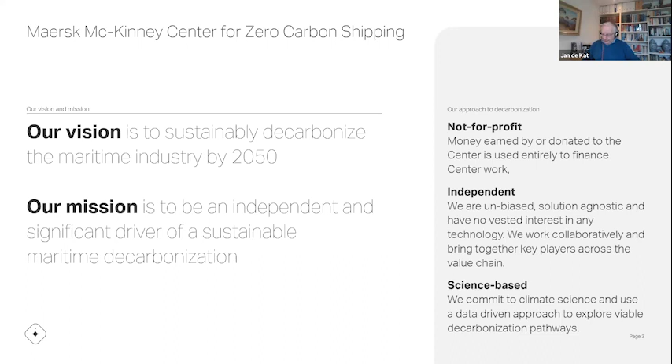The first one is reducing energy demand on the fleets. That's really anything to do with how to improve energy efficiency, how to help regulatory processes, and making legislation and regulations that encourage energy efficiency uptake. How can you do this? What kind of frameworks can be developed for this? How can we share information in this area?

The second is anything to do with new fuel, so the energy system. How do we scale up the green fuels? This is really a major challenge, we'll come back to that one. Also looking at what onboard vessel solutions you would need, but also infrastructure development, production of the fuels, and so on. That's all being considered here.

Then there's the ecosystem transition. This is where we say, okay, how can we identify first movers in the industry, and maybe also in the realm of green corridors. There are some green corridor developments in Australia, from Western Australia to Japan, for example, and another one we've been looking at, between New South Wales, East Coast, and New Zealand. But there's 30 or 40 green corridor initiatives. I won't go into further detail, but it's happening—initiatives to help accelerate this process of fuel developments, the ships, etc.

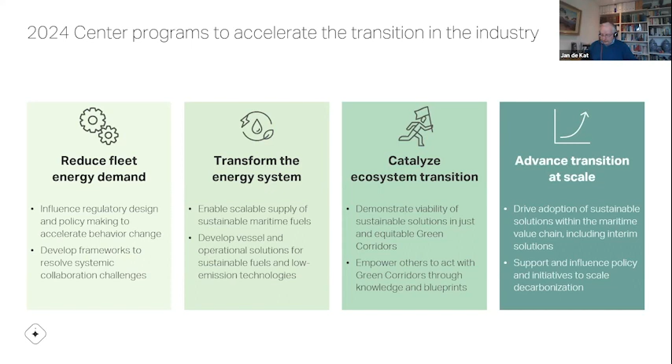And then the other one is looking into policy developments. This is to say policies that could be in place, or can we help develop policies? It could be IMO, it could be regional, like in the European Union, to help get this greenhouse gas emission reductions process working.

Just a few more words. The center was started 4 years ago. Now there's about 130, closer to 140 employees, partially full-time employees and partially seconded, and the center has a number of partner organizations.

Altogether with the secondees, we have well over 100 specialists, and they cover the whole area basically. This is super interesting because it's from the fuel supply side, people with a bio-fuel background, or economists, naval architects like us, all the way to the cargo owner. So it's really the complete value chain represented here, and everyone has basically the same focus or aim. These partner organizations, 24 of them, are the key partner organizations.

So if you look at this from the other perspective, where are these organizations placed?

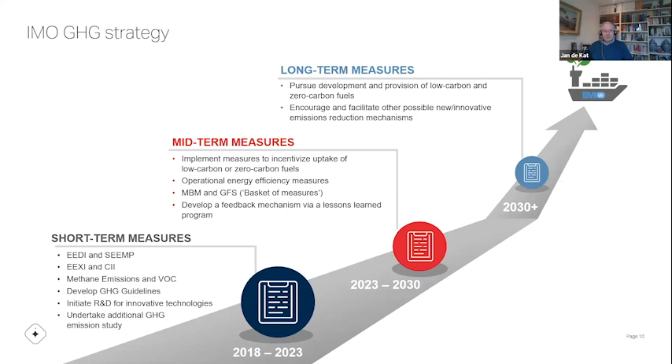But then we had the 2023 strategy, which was really a major breakthrough for IMO, because at that meeting - MEPC last summer - it was agreed to go much further than the 50% reduction target from 2018. That's the first time I saw a standing ovation from the whole plenary session at MEPC.

So what was agreed: by 2050 or thereabouts, to achieve zero greenhouse gas emissions, together with a number of intermediate steps and levels of ambition, including the carbon intensity reduction - that was actually one of the short-term measures from 2018, which has still been upheld. But also encouraging uptake of 5%, maybe up to 10%, of new fuels - zero GHG type fuels or technologies by 2030 - and reducing absolute emissions by 20 to 30% in 2030.

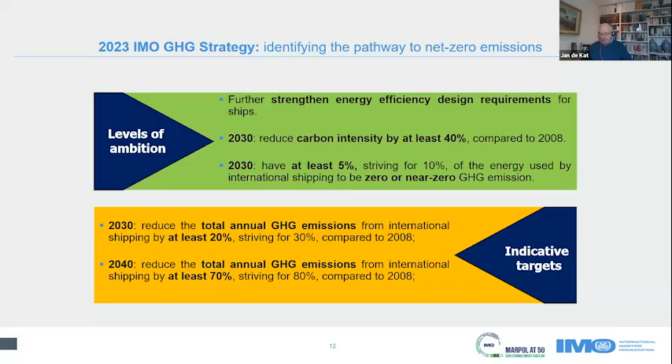It will go up because, as part of all the efforts we have now, trade will continue to increase, which means more and more ships will, of course, enter into the world fleet. And then how do you do this while you're actually reducing overall emissions? So that's one of the big challenges. Okay, so that's just the background.

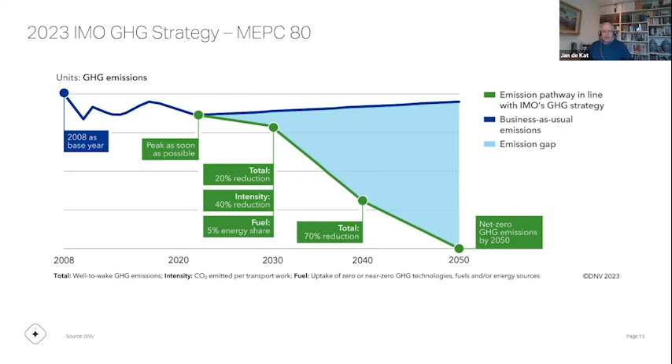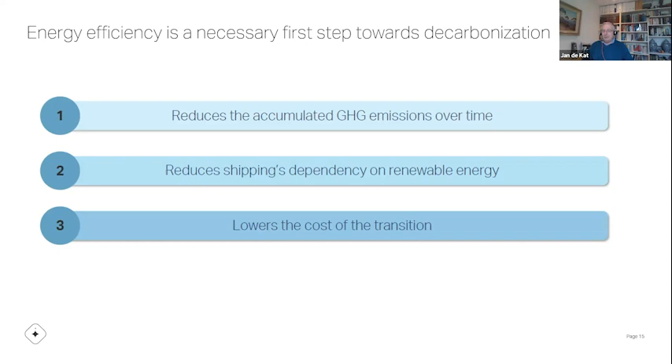So starting with energy efficiency, you could say energy efficiency is something we can do now. It reduces overall emissions for all ships, because you save fuel, but also by doing this, it reduces the dependency or the demand for the new fuels. So anything you can save there is, let's say, invested. And of course, it affects also the bottom line. The more efficient the ships are that we are running, the less the operating expenses will be. So the cost of transition will be lower.

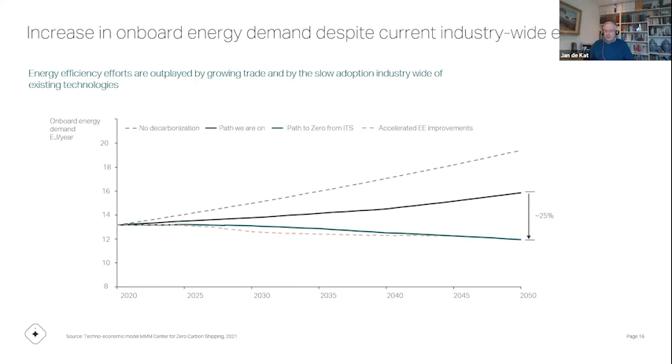A quarter of ships would then also have to invest in the more expensive technologies such as air lubrication and wind assisted propulsion, as we were just talking about. And there, you see it would mean a 400 times increase in what we have now in terms of adoption of these technologies. And this would all have to be done by 2030. So definitely a big challenge.

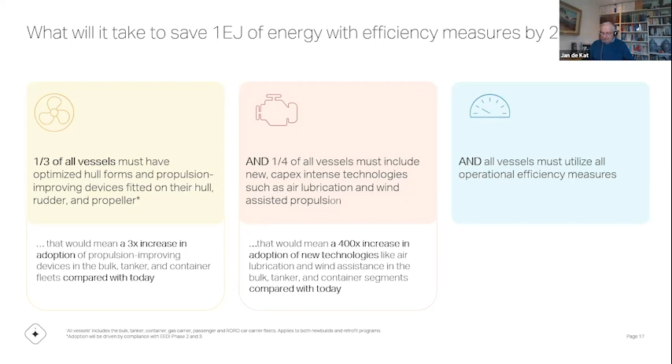And we did some analysis on the different efficiency measures that are at our disposal, and it could be technical solutions, hull and propeller design, engine systems, energy efficiency on board, new technologies, and operational measures, of course, really important too: what you do with your hull cleaning, voyage planning, weather routing, all these kinds of things, the utilization of the vessels in the fleets, and so on.

The picture on the right paints, I think, a not so great picture. Which ship segments have invested or are doing this as a matter of standard procedure, design and operation wise? The cruise ships, the passenger vessels, they do this now. It's almost all vessels. Container ships are on their way, but not all of them do this. But it's very limited, as far as we could see, for the bulk and tanker sectors. And if you look at all these four sectors, especially the bulk carriers, the tankers, and the container ships.

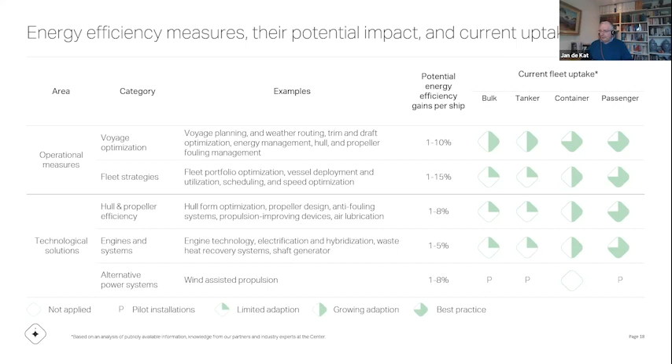They already take care of the 80% or so of the total emissions for the world fleet. So they are really important to have included. So the question is, then, how can one encourage the uptake of further energy efficiency for those kind of fleets? One thing is maybe you could say regulatory.

We talked about EEXI, so that's the EEDI for existing ships. As I said, I'm not sure about its impact in terms of energy efficiency. But the other one here on the right, the CII, which is this carbon intensity indicator, could have a higher impact on the uptake. And this has just started last year. The reporting is being done now for the first, let's say, year of operation, and let's see what

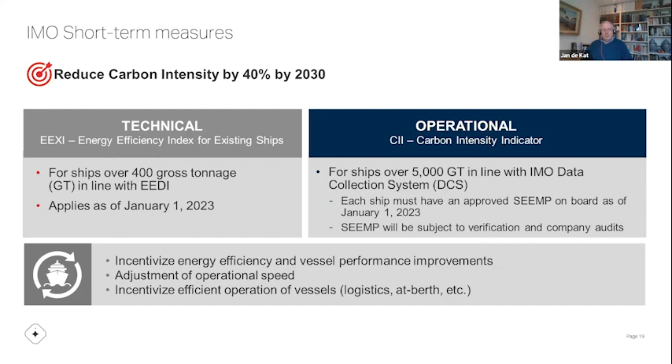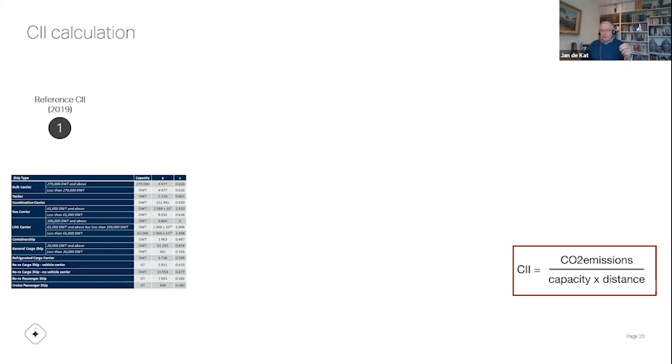comes out of it. If you look at how CII is calculated, there was a lot of work done on investigating all of the different ship segments, from the cargo vessels and also passenger ship and ferry areas. Lines were drawn to say, okay, what is the carbon intensity for those vessels as a function of dead weight, and this carbon intensity is basically CO2 emissions per transport work. That's what's called carbon intensity.

And the idea is that the required or allowed carbon intensity would be stricter and stricter as the years go on. So you can see here the table in the middle. We're starting in 2020, and then every year it is reduced by 1%. As of now, every year will be a 2% reduction until 2026. And after 2026, there's no agreed reduction yet.

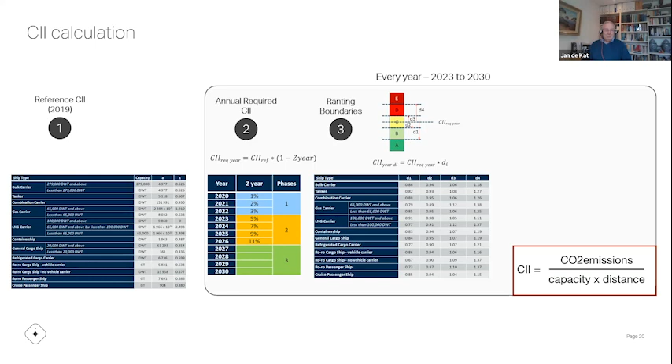So the idea is that every ship would have to compute, after 1 year of operation, what the carbon intensity has been, and then you get a rating. Depending on how well you do, you get an A, B, C, D, or E rating. And that's really indicating how efficiently the vessel has been designed and operated. So if you're in the D category, it means you're above the allowed, or let's say intended, target for that particular year.

And then you have to come up with a plan to improve that efficiency and show that you are doing things to actually get back to a better rating, the C or the B or whatever it might be. Trouble is, it's not so easy. It depends on the ship type and its operation, its trade, very much. And one of the items is also that the CII, as you can see here in the right bottom, is expressed as the amount of CO2 emissions divided by capacity times distance. So this is sort of a proxy for transport work, but capacity meaning the dead weight.

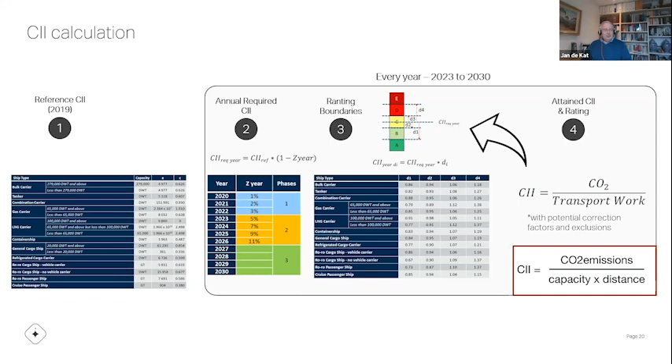So whether the ship is fully loaded or partially loaded or in ballast condition, that doesn't matter. It would still get, let's say, the same rating. And this proxy is called the AER, the annual efficiency ratio. And so for some vessels, it could definitely be a challenge. So you can see here just the principle of it again. Over the years, for a given ship type and dead weight, you get this progressively more strict requirement for the CII.

You can be in the D rating for like 2 years or so, but then you have to come up with a plan anyway. If you have a ship in the E rating, immediately you have to come up with a corrective action plan, as it's called, which means you really have a limited time period to improve the performance of the vessel from E to C or better.

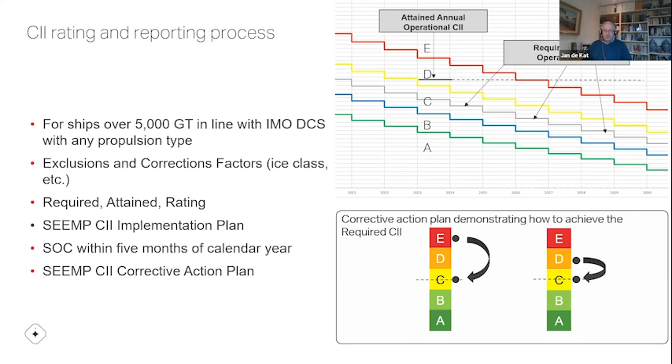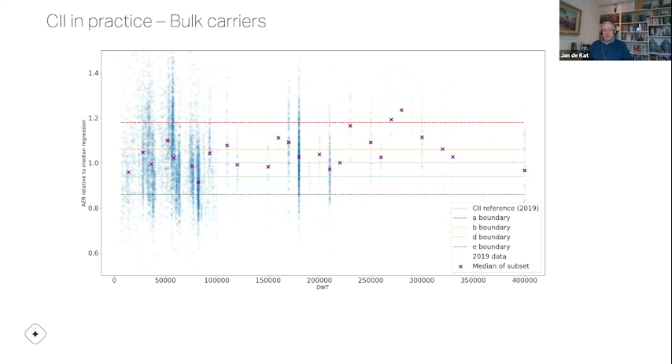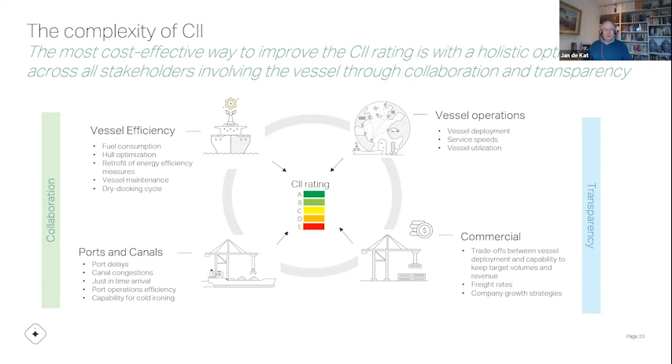So just to indicate, we have an interesting challenge here for ship owners and the charterers. And this is really the issue with CII because it's influenced by so many different things. It could be the vessel design process, how efficiently was it designed, how is it operated. It's the delays in ports that will affect this factor, how the ship is maintained, and then there's commercial decisions. All of these influence this. So you could say, therefore, from a contractual perspective, also quite a challenge. Okay, just to be noted, but we hope at least that this will definitely focus everyone on the need to be as efficient as possible.

I won't go into much detail here, but just to indicate there's quite a long range of things that one can do to improve the energy efficiency. And these are just indicative efficiency gains that could be expected, but anywhere from a few percent to 10%, or maybe some even higher than 10%, could be achieved. And by the way, we say here for wind assist up to 8%.

This is wind assisted systems that have been tested and publicized, but there's also now, instead of just wind assistance provision, systems that maybe provide a significant amount of propulsion power. It could be 30 or 40% or 50% or whatever. But that's coming up in the future. So these are numbers for the typical cases where we're seeing the wind assistance system. But similarly for other things like power generation, what can you do with frequency control drives or boiler optimization? So there's small things or big things one can do.

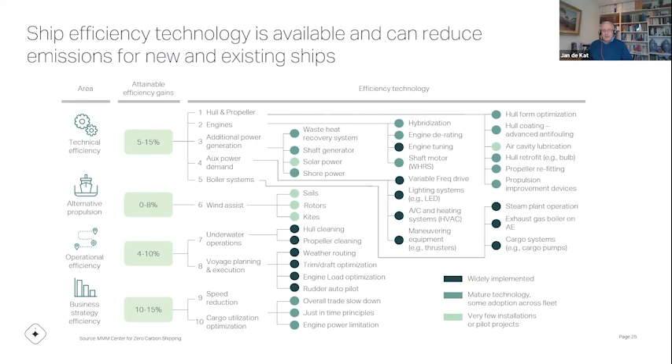There's a lot of things one can say. You can talk for hours about this, but I think one really important thing is to be aware of ships, especially these kind of ships. For example, container ships have an operating profile which is quite varied in terms of the drafts, the degrees of loading and speeds. Yet in the past, these ships were designed for one particular loading condition, which used to be fully loaded, high speed, like 24 knots, 25 knots.

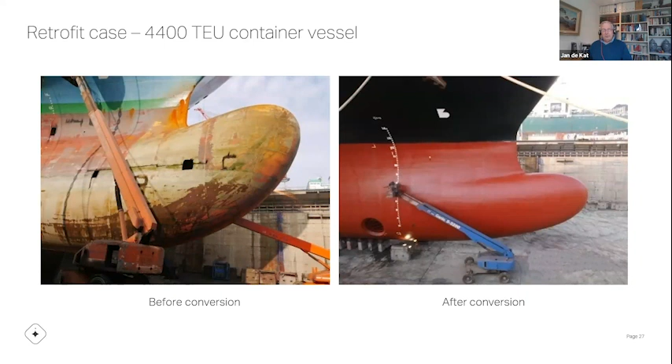And this is just a retrofit example on a container ship. It was designed originally with the bulb on the left, your typical good old-fashioned bulbous bow. But then we looked at what can be done; you can use CFD and model testing to optimize the bulb for its operating profile, and then you get a rather different looking bulb, and just the bulb modification gave, I think, an average fuel savings of about 10% or so. So we can do the same with propellers, energy saving devices, and of course anything inside the vessel too.

And when it comes to the energy demand, there's a lot of things one can do here too, in terms of things like waste heat recovery, also for smaller systems on board, combinations, battery systems. So we can see now coming up for ships, maybe not for propulsion for the big ships, we can forget that for the moment being, but maybe for power generation. So you can let your auxiliary gensets run on a constant level, and when you have a peak demand, you could have a battery system take up the peak, and so on. So there's a lot of things one can do here.

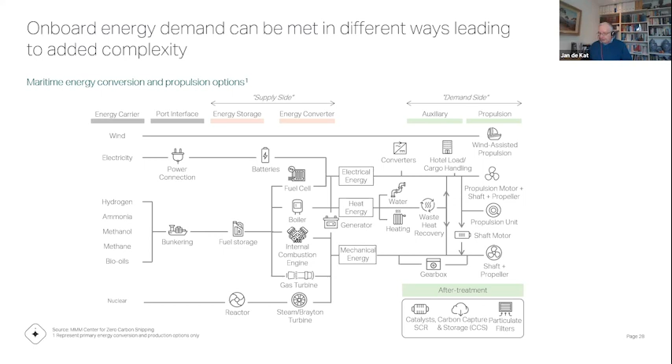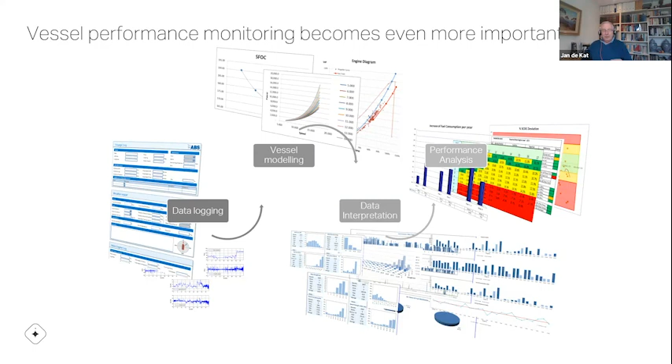Lastly, it's really important, even more important now, to have very good information on how ships are performing. That means you have to do performance monitoring, very accurate measurements of your fuel consumption. What are the conditions? Can you note when the hull gets fouled or the propeller gets fouled? Engine inefficiencies can all be detected, but you need a good system on board. This could be another item to talk about for hours, but it's really important, and as alluded to earlier, when we have greenhouse gas pricing, a CO2 levy or whatever coming up, it will be even more important to have very good information on the actual fuel consumption on the vessel.

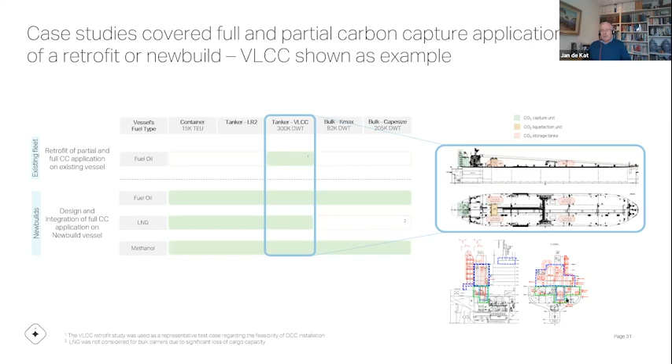You can see here some pictures of how the impact would be on the superstructure area, on the engine room, and so on. Now, for me at least, one of the big surprises was that the extra energy required to do the capturing is significant. Of course it depends on the CO2 capture plant, but what we have seen - this is an amine-based system from Mitsubishi - I think you get similar things for other systems. At least I've not seen one that's very efficient, but just to indicate, to get about 80% capture rate of your CO2, you need another 40% or so extra energy to just run the equipment.

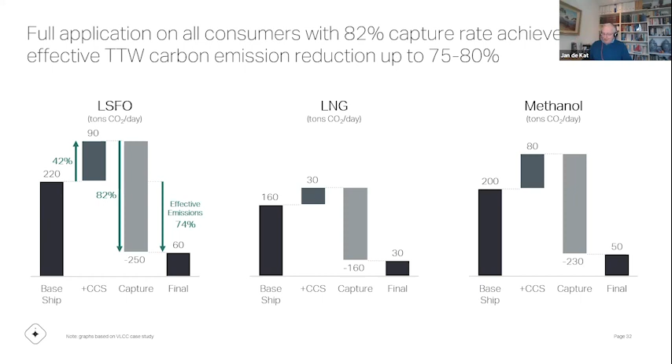And then we should also note that, because you have that extra energy requirement, you also need extra fuel, obviously. If that's conventional fuel oil, then you need to look at its part of the impact on total emissions. But even when it's a green methanol or some green fuel, it will be significant.

You see a significant additional cost because of the additional fuel, compared with the case where we have no carbon capture. So leave it at this, there'll be more work definitely. It is ongoing, with more proposals and information coming into IMO on this from different member states. The other thing is you must look at the total picture: what do you do with the carbon captured? Where do you bring it on shore? What is going to be done with it? How do you ensure that carbon will be used, either stored on the ground permanently, or can it be reused for producing, say, a methanol type of fuel? Anyway, still to be followed up.

Then finally, a few words about the new fuels. I think the important thing is just to look at the types of fuels. We often have the fossil fuels now, but biofuels have been coming up, meaning any kind of biomass or waste product, agricultural waste or whatever, that can be used to produce some kind of biofuel.

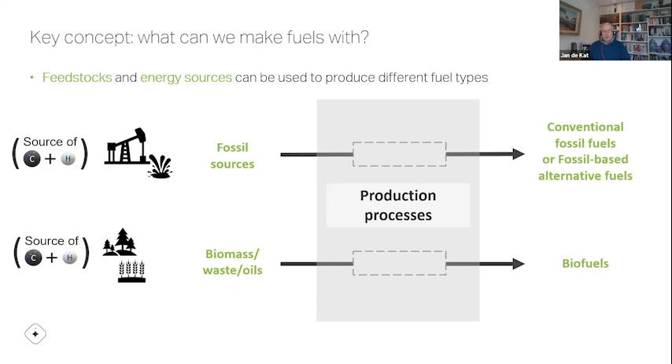But the other big one, you could say, are the e-fuels, electro fuels. The idea is that those fuels would have to be produced with renewable electricity and water. If it's going to be an e-fuel with carbon, for example methanol, then you also need carbon capture, which could be at a point source, from atmospheric direct air capture, or from biomass. So there are different ways of making such e-fuels.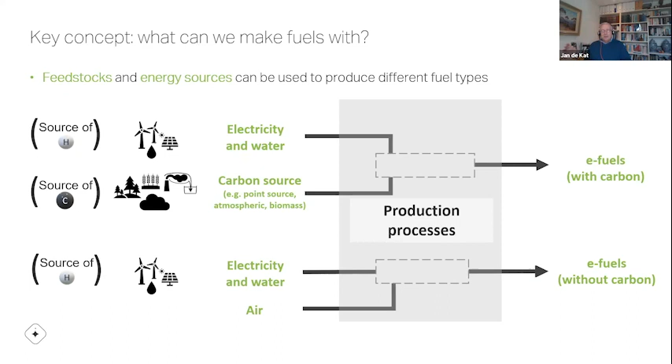And there's also an e-fuel without carbon, the only one we know of at least now, which is ammonia. Hydrogen is what you basically need, together with nitrogen, to give you ammonia. So anyway, that's the quick rundown on the e-fuels.

If you look at the fuels of choice, there's a lot of different fuels we see right now. Besides the conventional HFO or MGO, we see LNG, LPG, even ethane, methanol, etc. You can see the long list here. But if we look at what we see as the likely close-to-zero or zero GHG fuels...

...for large ships, for deep sea shipping purposes, will be biomethane. So it's not LNG, but like LNG, with a bio source, or it could be e-LNG, like we just talked about with the electrofuel process. But biomethane is more likely as we see it now. Same with methanol, it could be biomethanol or e-methanol. Ammonia, e-ammonia, and biofuel. So those four, you could say, are the selection we can foresee for the future.

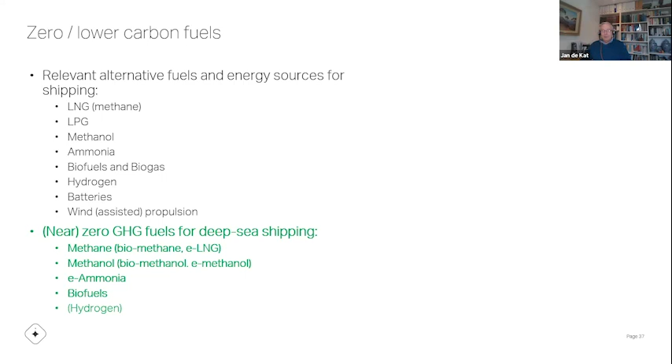Hydrogen is very important as a basis for these fuels, but hydrogen by itself can be used as a fuel for really small vessels. There are a lot of issues with hydrogen if you want to put it on a large ship for deep sea ocean voyages. The temperature has to be minus 253 degrees, or you'd have to pressurize it to 700 bar to liquefy it. So there are definitely a lot of practical issues with hydrogen, but maybe we'll still see it in smaller vessels, small ferries for example, for short distances.

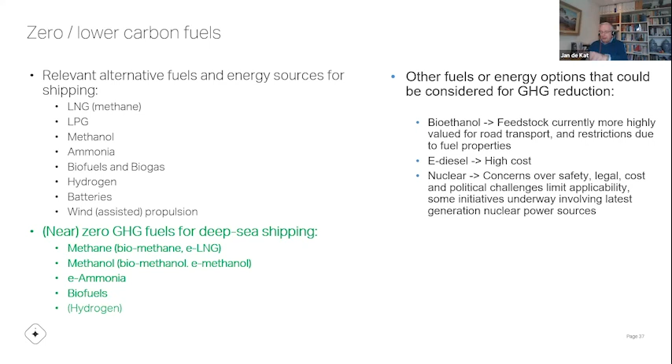We have not looked yet at, for example, nuclear power. There's some work here and there going on to consider whether nuclear propulsion plants are feasible. Who knows, you could also say nuclear power could be used at least to produce the greener fuels, just because it's a zero greenhouse gas electricity producing way. And there's bioethanol and e-diesel, which has a high cost. So for now we can see those, let's say the green ones, on the left bottom corner.

You can see here that about 50% is conventional fuel, and the other 50% is more the non-conventional, new fuels, including LNG. The batteries you hardly see because it's only really for small vessels. Batteries are not really suitable for propelling big ships over large distances. It's just to indicate that it is happening.

And so definitely methanol - we see quite a few ships that have been ordered to run on methanol, and that should be the green methanol. But also now we already see ships that are ammonia ready, because ammonia engines are not available yet on the market, but they will be soon - next year, or later this year maybe, we see the first ammonia engines appear.

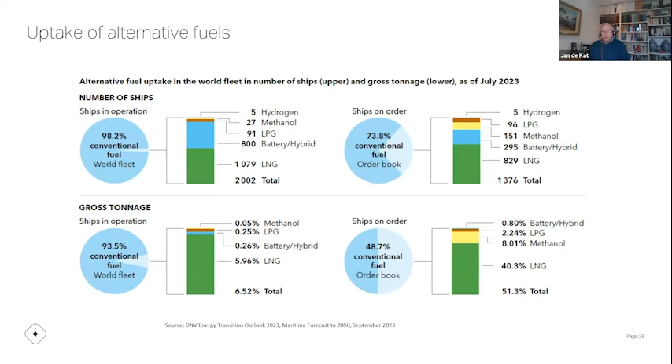I won't go into detail, but again, this makes it also hard to say which fuel is going to be the answer. We're definitely shifting from the single fuel that we had in the past, just the basic fossil fuel, to a multitude of different fuels. And it will be hard to say which ones will be preferred - it depends on the vessel types, the trades, production cost, etc.

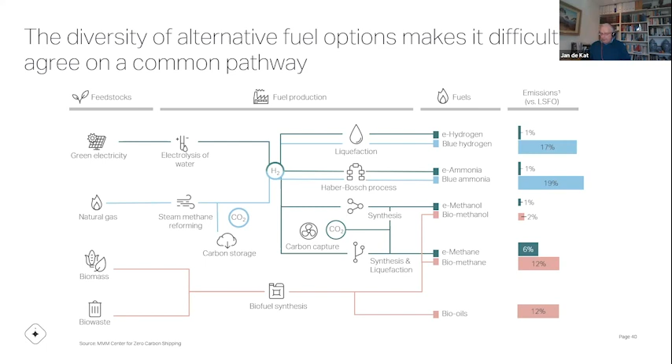At least here you can see the basic schemes in which those green fuels can be produced. And then at this center here, Mærsk Mc-Kinney Møller Center, a lot of work has been done in terms of developing a simulation tool that really captures everything from the fuel production pathways, feedstock availability, to shipyard capacity, ship forecasts, retrofitting forecasts, energy efficiency uptake, owner decision making, the influence of greenhouse gas pricing.

So anyway, there are a lot of different scenarios one can develop, but this is one of the scenarios you can see here. And this would be one of the scenarios that would lead to a zero greenhouse gas emission situation by 2050. And you can see here that we have LNG coming up now.

But LNG by itself is not really a zero greenhouse gas fuel, as we should know. Of course, it maybe gives you a 20% or so at most reduction compared with normal fuel. But if you have LNG fuel ships, it can be also burning biomethane - basically the same, but it's from a biomass background, and that could be seen as, let's say, a net zero type situation.

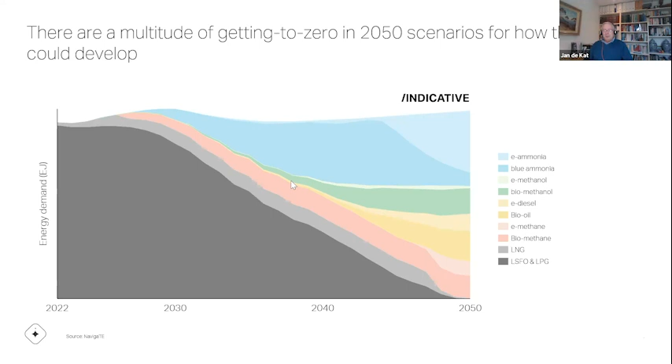We have biomethanol, the green one here. So anyway, these scenarios depend on so many of the different situations that you're modeling, but at least we want to get an idea of how that behaves.

A quick word about life cycle, because this is also really important when you start looking at the fuels. One thing is the emissions coming out of the funnel - that's what we call the tank to wake part, and that's just a function of the type of fuel and the type of engines, engine load, etc. You get your CO2 emissions, plus maybe other components that have a greenhouse gas effect.

But then you also should look at the well to tank part, because you could say, for example, if I burn hydrogen, in the hypothetical case, I have zero emissions. But then if you need a lot of energy to produce pure hydrogen, that would cause that image to completely change if you then look at it from the well to wake perspective. So therefore, and it's the same for all the fuels.

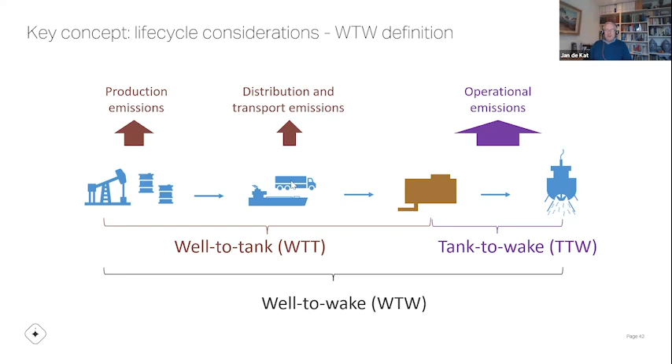So therefore, this is another item at the IMO, as to how do we deal with well-to-tank versus tank-to-wake.

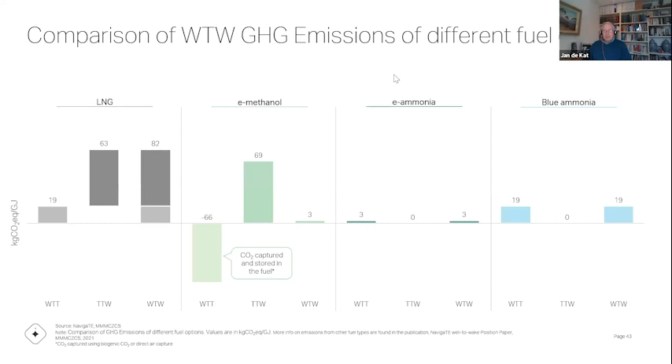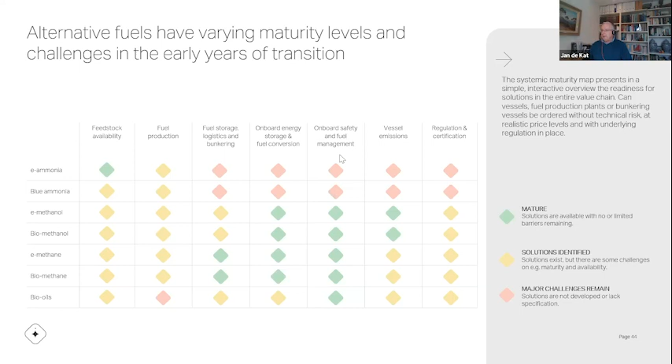That means there's some major challenge, and this is for the ammonia especially. It's from the bunkering perspective, also the regulatory perspective, emissions. Of course, for example, you could have ammonia slip or N2O, which is part of when you start burning ammonia - an issue, possibly safety. So here's definitely some challenges.

Which means if we're going to be equipping our vessel to run on methanol or ammonia, you need either a lot larger storage for the same range, or you simply accept you have a reduced range for the vessel, right, and you have to bunker more frequently. So this is really an interesting item.

Methanol is the example where you don't need to make any, let's say, refrigeration or cryogenic requirements, which you still have to do for ammonia, but it has to go down to - you can liquefy it at -30, -33 degrees. So that's doable.

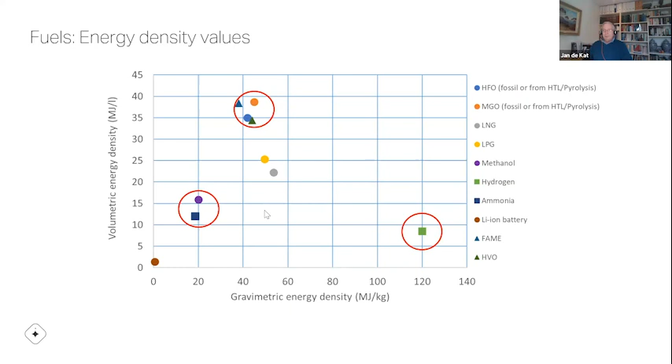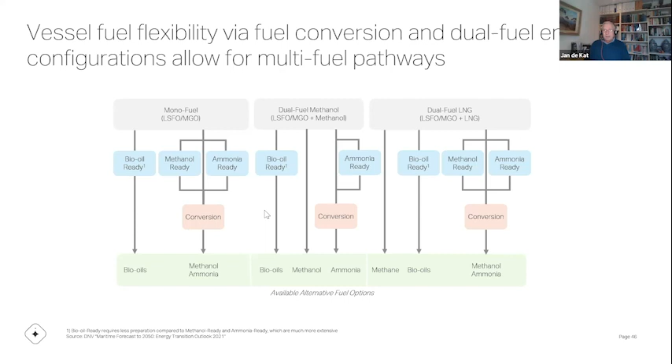So you can make those, and then, for example, the containment systems could be designed for LNG, but then you can also make extra arrangements to make them capable of, for example, storing ammonia instead of LNG. So anyway, that's interesting to follow. There's one issue with methane as a fuel, and that's methane slip.

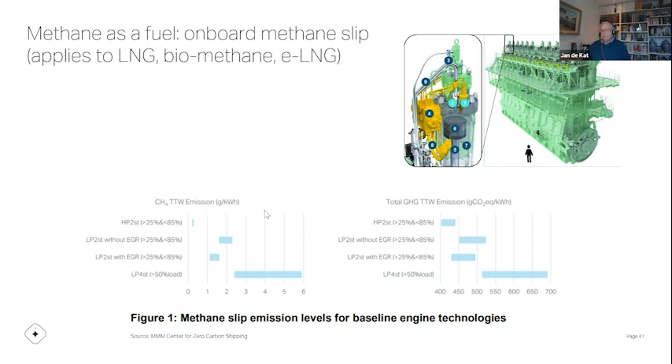The problem with methane is it has a high impact on greenhouse gas. Its global warming potential is 25 times higher than CO2 over a 100-year time frame, and even around 80 times higher over a 20-year time frame. So you really want to reduce methane as much as possible.

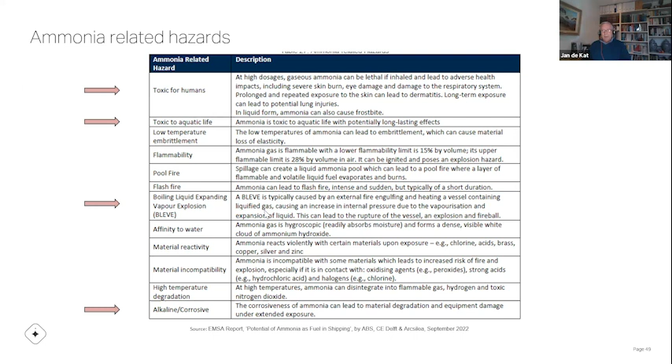Lastly, looking at ammonia as an example, hazards are a key issue because it's toxic, to humans for sure but also to aquatic life. There's the question of what happens if there's a sudden leakage in the containment system, where explosions could occur, and it's also corrosive. A lot of these things have to be assessed, and there's a process for doing hazard identification studies.

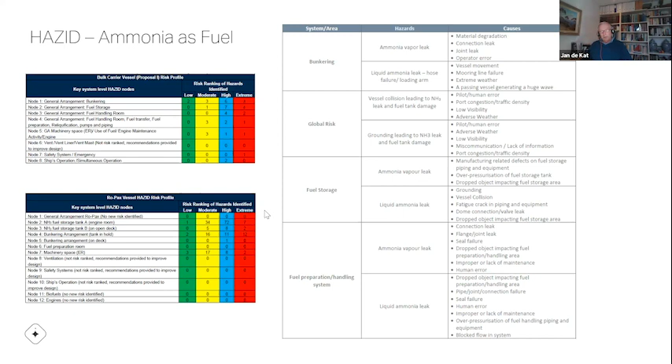These studies have been done a lot in recent years for all kinds of applications - here a few examples with a bulk carrier and RoPax vessel, where you go through all the potential hazards, rank them as low, moderate, or high, and then look at ways to mitigate those risks. You look at the causes of those hazards, and then decide what can be done to reduce the potential that a hazard occurs, or if it occurs, mitigate its consequence. Here you see a long list of things that could happen - it's a matter of understanding the potential hazards and then addressing them.

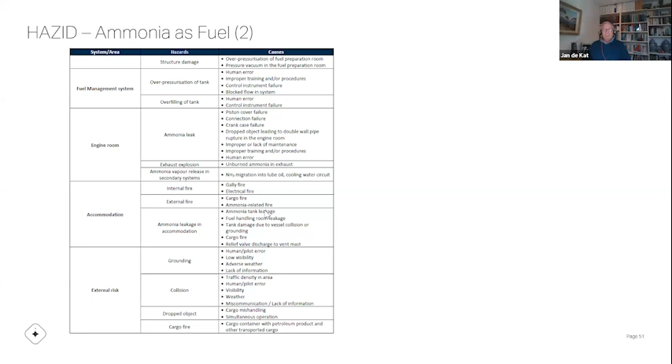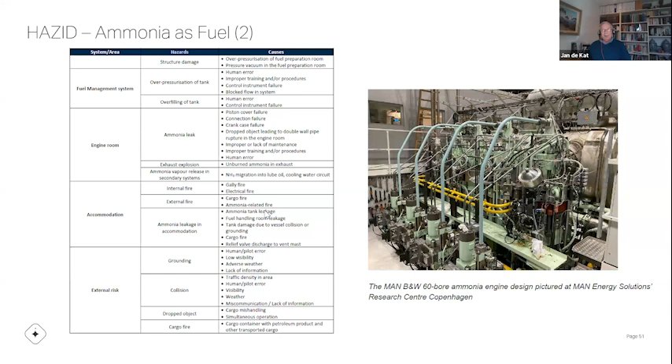There's a lot of work going on around what you can do with capturing the ammonia, because you don't want to just vent ammonia freely into the atmosphere. So they've been doing a lot of work on ammonia capturing systems that could be connected with the engine system. There's a lot of issues to consider.

I don't think there are any showstoppers here, but it's certainly an area that has to be further analyzed and considered. Here's an example of what you end up with - these risk matrices in terms of the frequency of the hazards and the severity, where frequency times severity gives you the risk, and you want to move out of the red region toward the yellow and green regions.

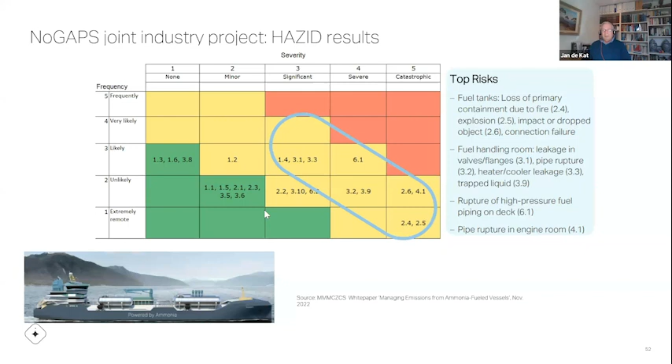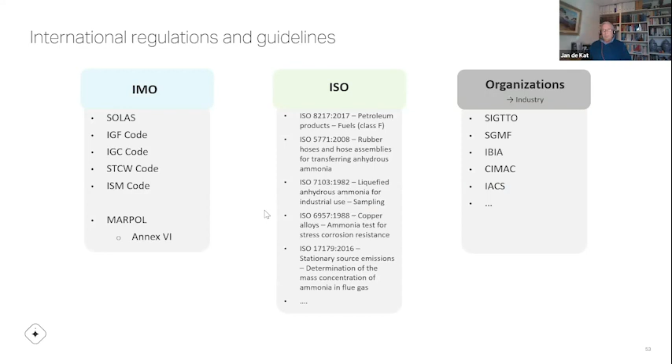So it's a great focus area, because ammonia is one of the potential fuels that really has a zero greenhouse gas profile when you burn it. Therefore, regulations in this regard are really important - there's a whole set from the IMO, but also ISO developing standards, including SIGTTO and bunkering standards.

To complete this, there's the IGF code - the IMO code for the use of gas as a fuel. It covers natural gas such as LNG, but also looks at methanol, ammonia, and hydrogen. With all this, hopefully we can have the regulatory framework in place and look forward to the future.